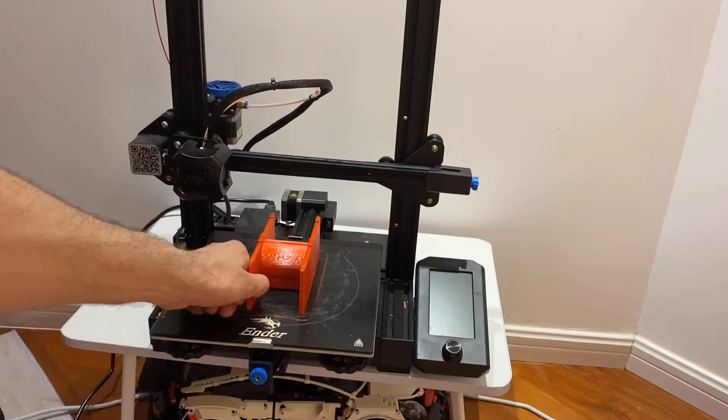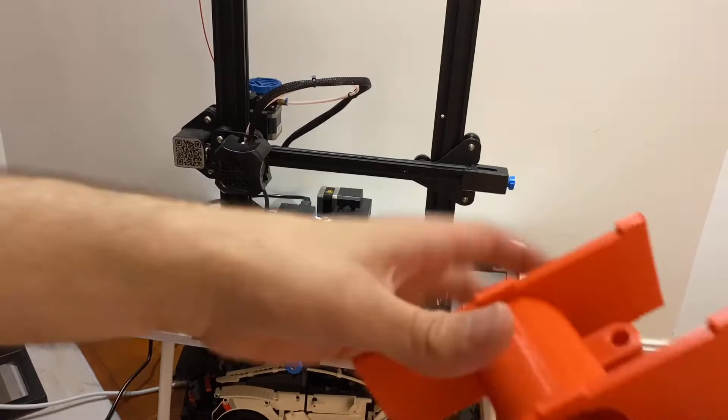Number 1, part support structure. Here you can see an example of this sliding piece that I 3D printed. In order to save some time, I printed it to minimize the support structure, but the support I did have was inside this cylinder piece. This took probably 30 minutes or more for me to dig and cut and punch out all that material. In fact, if this cylinder were any smaller, I don't think I would have been able to get the material out at all. Let's take a look at this slider piece in Cura, the slicing software.

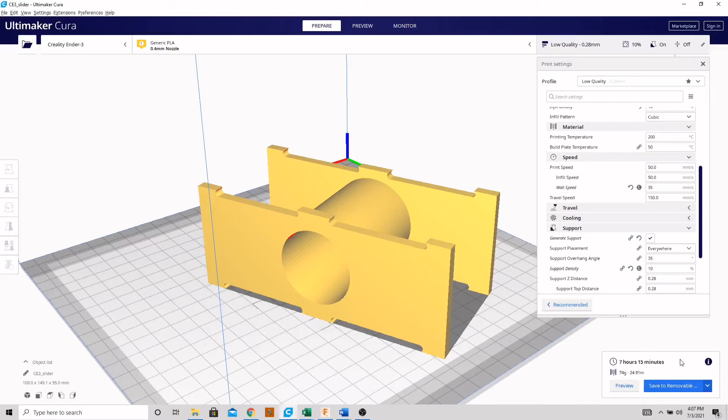This is how I initially chose to 3D print this part. Underneath, the red areas are the areas that need support, and I did it this way to minimize the amount of support material needed. So you can slice it here - you see this takes about 7 hours and 15 minutes. When you go to the preview, that's where you get this whole cylinder filled with support material. And that was really the struggle, to break that out of there.

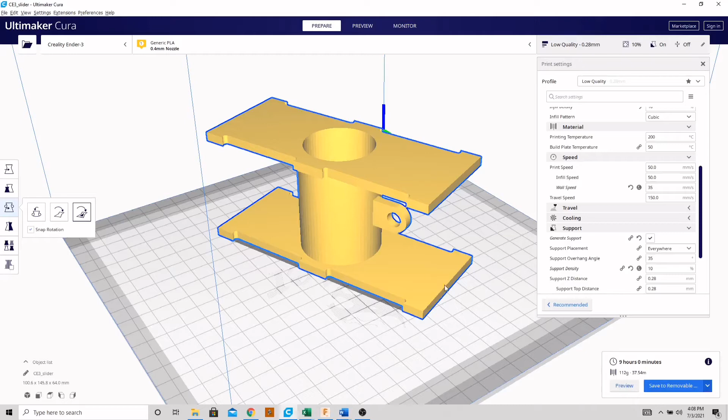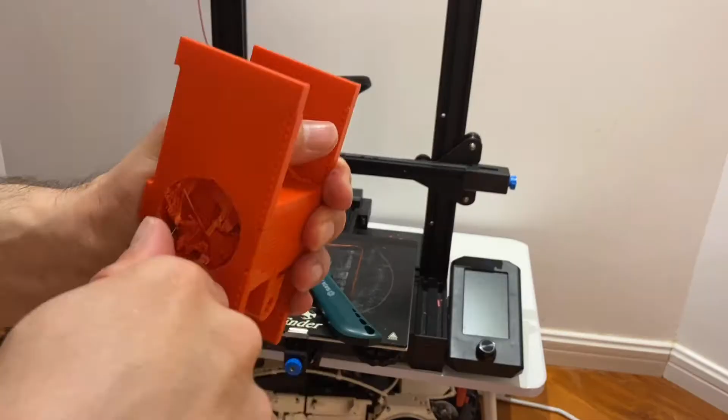Let's look at a different way we could have printed this part and see how that changes the time to print it. If we print the part upright like this, we're going to have a lot more support material because this whole underside of the surface needs to be supported. You'll see that takes a little bit longer to print, 9 hours, but once this is all done, you can see there's a lot of support material here. Once this is all done, I found that this was actually a lot easier to remove the support material. So the big takeaway here is not just to minimize the print time needed, but also think about what type of challenge or struggle it's going to be to remove the support material, or can you even remove it?

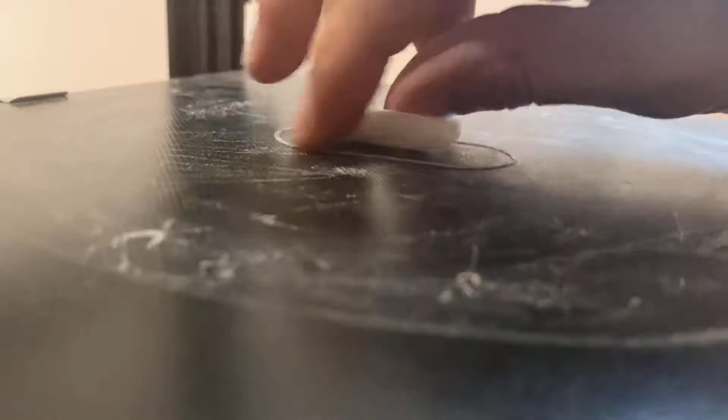Lesson learned number 2, bed adhesion. Here you can see a finished print of a linkage part. On this part, the front end of it was not sticking to the bed properly - it was peeling up away as the print was going on. So after that was printed off, it would not work properly for me. You can see the curvature at the bottom of the part here.

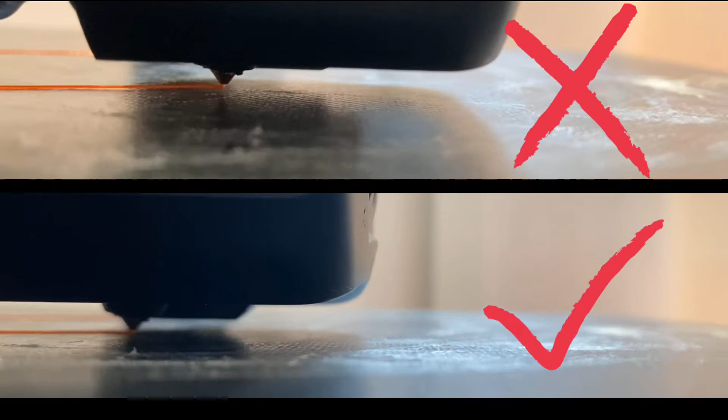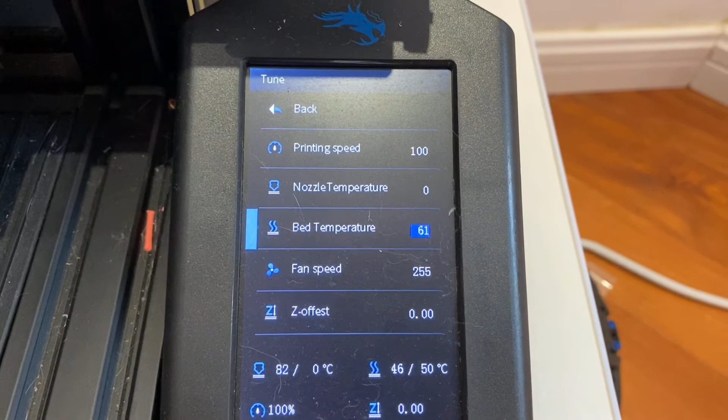So there's a few things you can do to fix this. The first is check your nozzle height - make sure your nozzle is close to the bed, like the bottom picture here, and not like the top. The second thing you can do is adjust your bed temperature. For PLA, you can increase it to 60 or 70 degrees, which will help adhesion. Another thing you can do is add a brim to your part - this is a setting within your slicing software. You can see here it's added several passes on the first layer around the part, and compared to the old part, it's holding the front end down perfectly flat. So that solved the issue.

Lesson learned number 3: test early, test often.

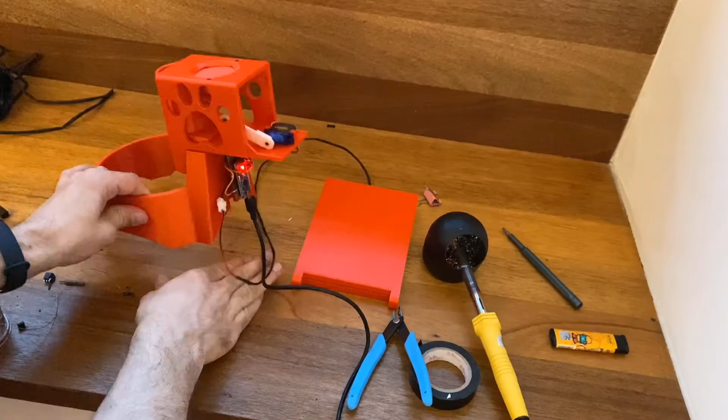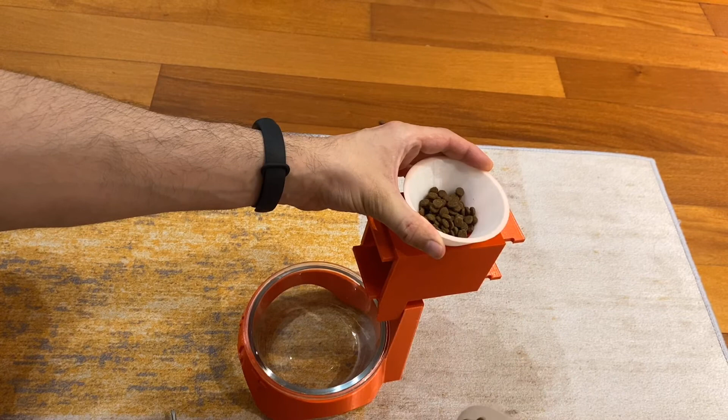With any complicated system, what you want to do when designing it is break it down into subsystems and test those individually. So the first thing I did was test the structure of the part with no electronics, no servo motor—pouring some food into the basic structure here just to see, does the basic concept work?

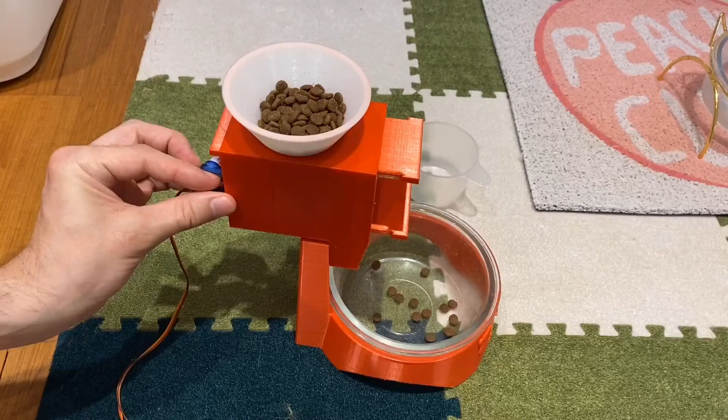Knowing the basic structure works, the next challenge was how to motorize this structure, what to use to move it. I wasn't sure if the servo I had was strong enough, so I took a quick and dirty approach and modeled up some little test linkages, holding the servo by hand to do initial testing. I had mixed results—it wasn't perfect and the linkage wasn't working properly. But I got enough testing done to give me confidence that this motor and linkage would work out.

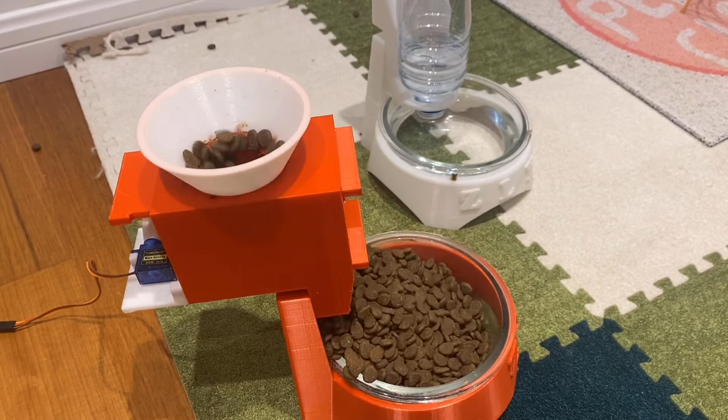With confidence I was going down the right path, I modeled up the actual motor mounting plate and linkages of the correct geometry and had more quick test parts printed out. With this I was finally able to verify the full function of the device. The basic takeaway: instead of spending a whole bunch of time up front on something that might not work, you can throw together quick and dirty test models to get an idea early on if you're going down the right path or need to change plans.

Lesson learned number 4: don't be afraid to modify your parts.

That part you just spent 8 hours printing, you want to test a new part without this extra flange? Cut it off, who cares? The worst thing that can happen is you ruin your part. The best thing that can happen, you modify the part in 30 minutes, get your testing done, and save 8 hours of printing a new part.

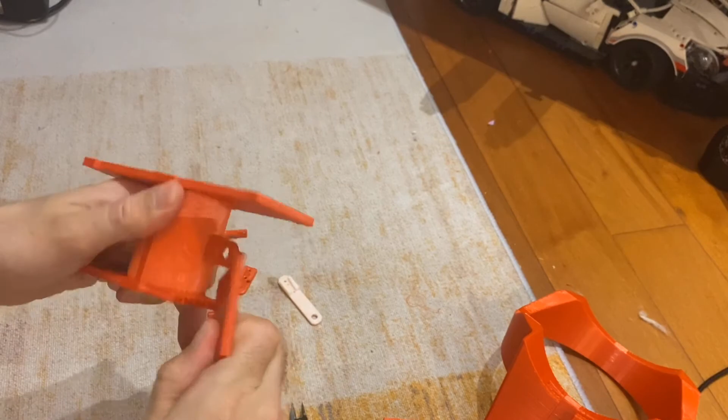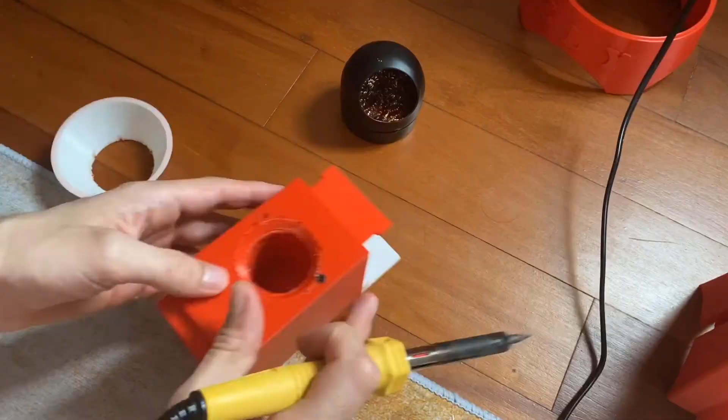Oh, you forgot to put a mounting hole in your part? Get your soldering iron, melt a hole in there. Not going to spend another 8 hours printing a new part just to add a hole. Mounting holes? Who needs them? With the latest technology in cutting corners, you can just take your soldering iron and melt your parts together directly. For prototypes, why not? Quick and dirty.

Lesson being, don't be afraid to modify your parts. You built them, so you can destroy them. Worst comes to worst, you can make a new one too.

And the last lesson: mistakes will happen.

Uh-oh, I think we have a problem. We have a short, so if that's happening, our switch is just not going to work. Let's put this together, see if it works. Oh, I made a mistake.

When things go wrong, and they will, don't get discouraged. Take a break if you need to. It's like riding a bike—you're going to fall down a few times when you're learning, but if you don't get back up and get on that bike, you're never going to learn. In fact, the most satisfying projects are the ones that had the most challenges along the way.

Good, we're no longer shorted.

So with that, those are my 5 lessons learned. I hope this can be helpful to anyone else making projects on their own.